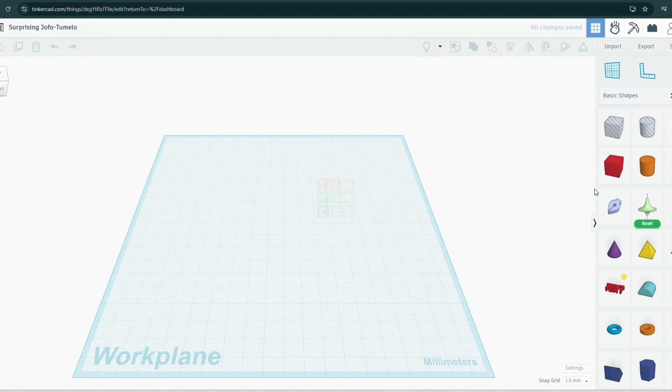Hey everyone, today we are making bookshelves to hang on the wall. Let's get into it. First, let's pull up Tinkercad. Don't worry, it's a piece of cake. The design is super clean and easy.

First, I'm grabbing a box and I'm just going to flatten it down to make it nice and thin. Now I'm stretching it out to make a large board. And finally, I am taking it a bit.

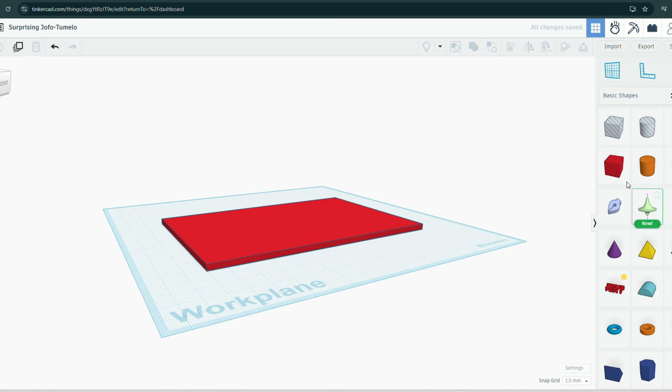Base is ready. Now I'm grabbing another box for the screw hole. I'm moving the box to the board and checking the center, then I'm making it thinner. Now I'm increasing the height a little bit.

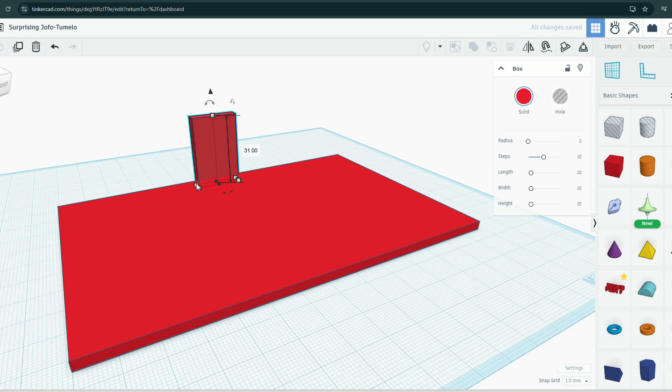Wait, I made it a bit too tall. Let me stretch it out to size now. I'm just fixing the size. Yes, now it looks great.

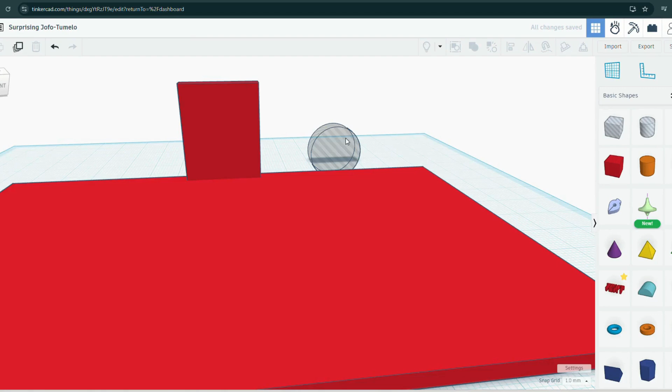I'm taking a hole cylinder, shorting and rotating 90. And now placing it right in the center. I'm still working on it.

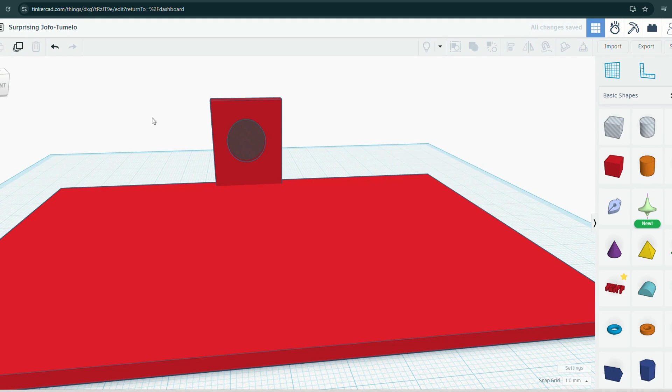Design is finished, selecting everything and grouping it all together. And here it is, our 3D model is ready. Exporting as STL and we are done.

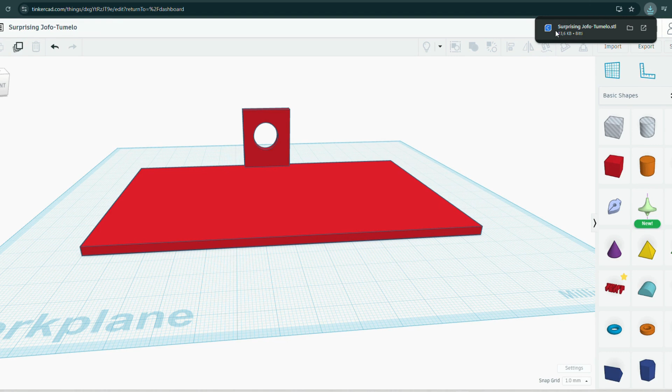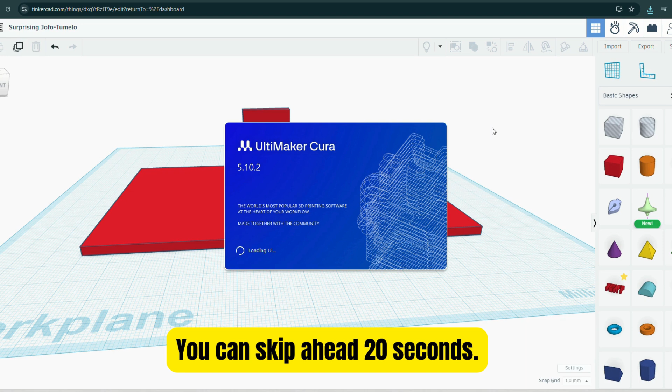It opens automatically in the slicer anyway. Waiting for it to open. It normally opens faster, but we are waiting. More waiting. And now the 3D model is ready.

The base could have been a bit thicker, but this works.

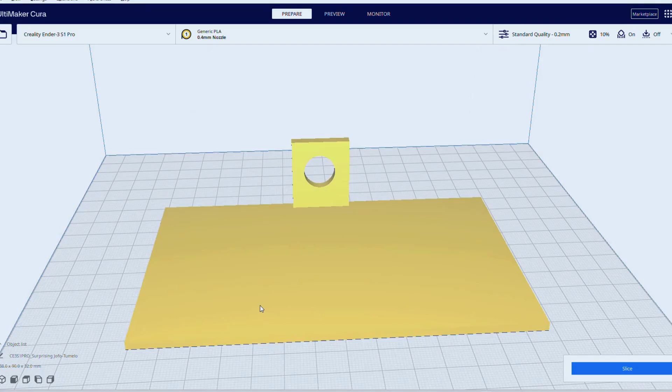Welcome to part 2. Now we are making it with two screws. Everything is the same, we are just adding one more screw. Now we are selecting this part and duplicating it.

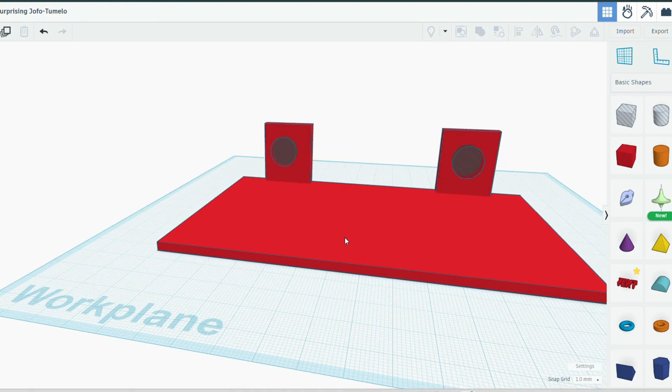This way with two screws it's much more solid. You know the rest, click export and download STL.